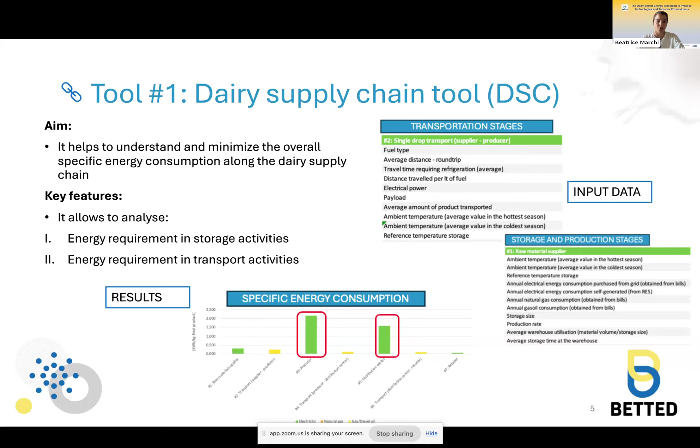The second tool is aligned with the first tool, but it shifts the focus onto a life cycle assessment tool. So it's not only focused on energy consumption, but includes the environmental impact perspective. The structure and result are similar, but in this case some more information is requested about other inventory data that can provide insight into the environmental perspective.

The three indicators we consider in the result are the global warming potential, so CO2 equivalent per kilogram of final product, the cumulated energy demand, so megajoule per kilogram, and the water use. We consider these three indicators because they are the most relevant for the dairy value chain, and the idea was also to have a simplified life cycle assessment.

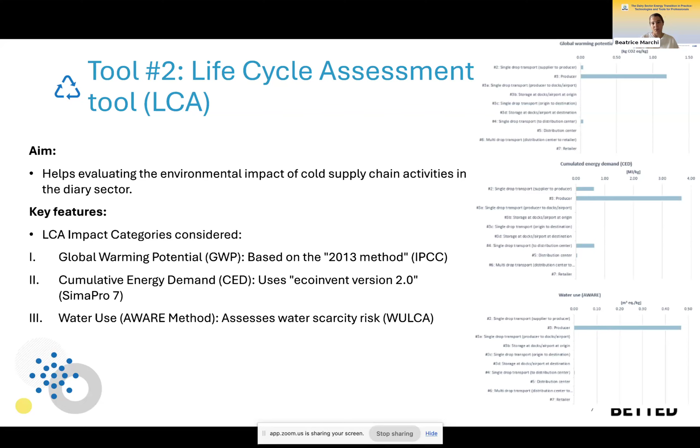Life cycle assessment is comprehensive and detailed, but it is also complex to use. So with this easy-to-use tool, the idea is that non-experts, companies, or users with access to only limited data can have this first assessment. The result, the idea, is that this tool provides results that complete the analysis the first tool provides, giving a wider perspective that also considers other relevant environmental impacts.

Based on the first and second tool, and on material available from the website, which consists of a list of best practices on energy efficiency measures, it's possible to start building a first list of energy efficiency measures with potential for our specific value chain.

The next step is tool number 3, focused on one different energy efficiency measure that we select with the support of the first and second tools. The idea now is to investigate if these measures are feasible from an economic point of view.

The life cycle costing tool is also, in this case, a simplified tool for this first assessment. The aim is to understand the costs and benefits of different energy efficiency measures and to compare their behavior to the current state, the scenario without any energy efficiency measure.

The life cycle cost includes input data, a template that supports the user in asking which are the main costs and benefits observable with the specific measure.

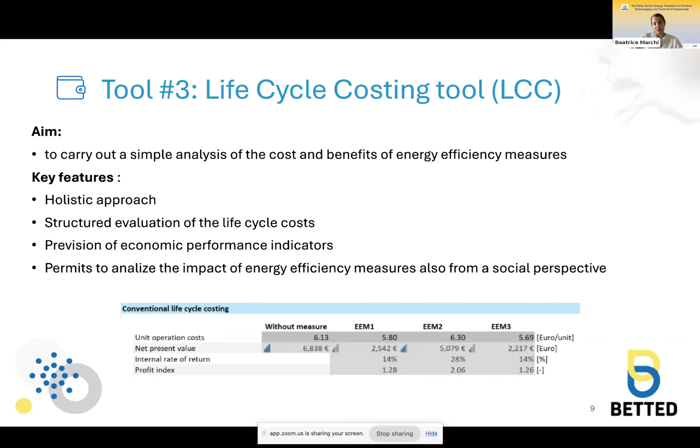With this result, we can prioritize the energy efficiency measures we selected based on the analysis performed with the previous tool, prioritizing them from an economic point of view.

These tools are focused on the supply chain, in the first assessment of energy efficiency measures. Now we have some tools focused on specific measures, starting with biogas in the dairy chain.

This tool is a bit more complex compared with the previous ones, and asks for some input data from the user, and in output provides a first techno-economic assessment on the use of biogas in the specific dairy chain we are considering.

The data required is a bit more complex and detailed, but there are also default values that can support the user if they don't have access to all this information. So also in that case, the idea is to have a first assessment.

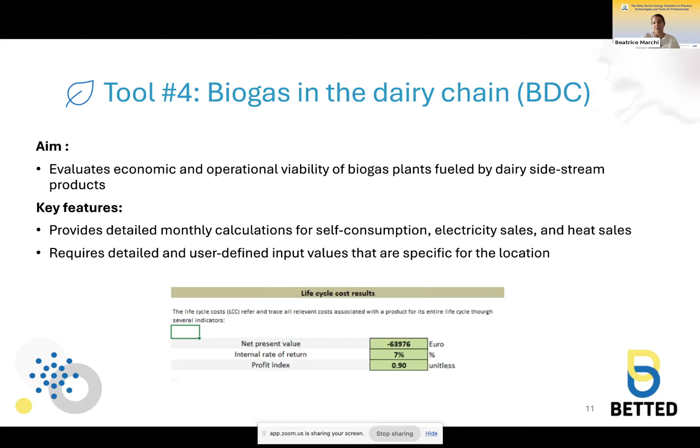The idea is not to design the biogas plant. The idea is to start thinking about this potential opportunity and to consider whether it makes sense to go on with the design of it.

Tool number 5 is focused on heat pumps. In this case, very few input data are required, and the idea is not to design heat pumps, but to show the user how performance changes in terms of economic savings and emissions reduction by changing the coefficient of performance of the heat pumps, and also by changing the share of renewables that covers the electricity demand for these heat pumps.

This is a first assessment. Of course, changing the coefficient of performance changes the performance, but this tool supports this first assessment in order to see if heat pumps make sense when the coefficient of performance is within a specific range of values.

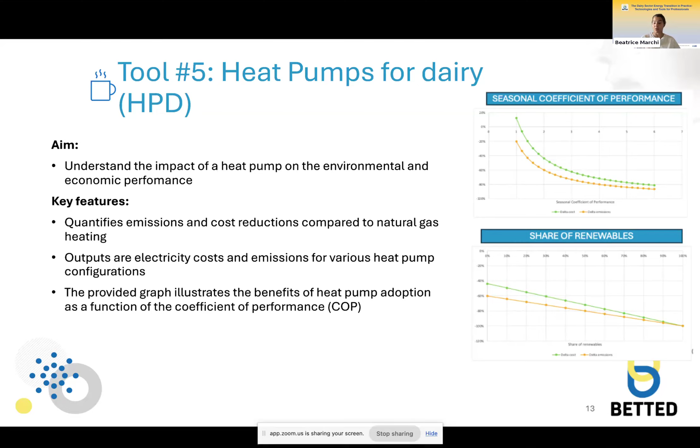The last two tools are no longer focused on technologies, but on tool number 6: cooperation with different actors. The idea is that the strongest companies inside the value chain can support the partners in order to improve their environmental and energy performance.

Tool number 6 is a questionnaire that supports the evaluation, the assessment of how the different partners, the different actors of the value chain behave in terms of sustainability.

There are 5 different sections covering climate impact, biodiversity and conservation, sustainability transition, social responsibility and governance, and energy efficiency, with several questions. Based on the answers that each actor provides, it is possible to assess and provide a score for each one of the actors.

In this way, it is possible to assess which are the weakest companies, which are the main issues. The idea is not to score them, but based on this result, to provide some input and support their improvement.

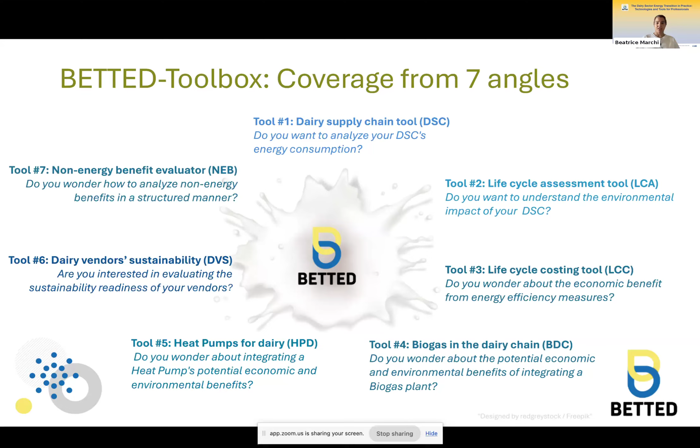The last tool is the non-energy benefit evaluator. Usually when we consider economic feasibility, we consider the energy savings deriving from the implementation of a specific measure. But this is not all the benefit that the measure can introduce.

The non-energy benefit evaluator is a tool that supports the assessment of all the possible benefits that a specific measure can provide to a specific supply chain.

It is not only a list of potential benefits, but the tool supports the user to investigate what can be the impact of this specific benefit. So it can improve the value proposition, reduce cost, or impact on the risk.

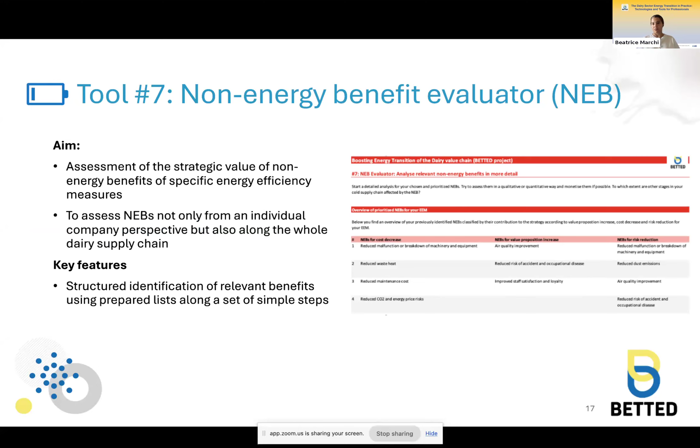Based on this template, it is possible to identify all the relevant non-energy benefits, understand their strategic impact, in order to make the measure more strategic to the financial officers, the actors inside the company that should approve the specific investment, and also to support the user in defining how to monitor this specific benefit.

There are strict regulations that govern this specific production process. In the operational context, the dairy chain we consider starts from raw material as raw milk, and the milk is then supplied to the production process.

This produces seasoned cheese, grana padano, with about 8 to 10 liters of milk for 1 kilo of cheese. During the production process, whey is also produced, about 6 to 7 liters per kilo of final product.

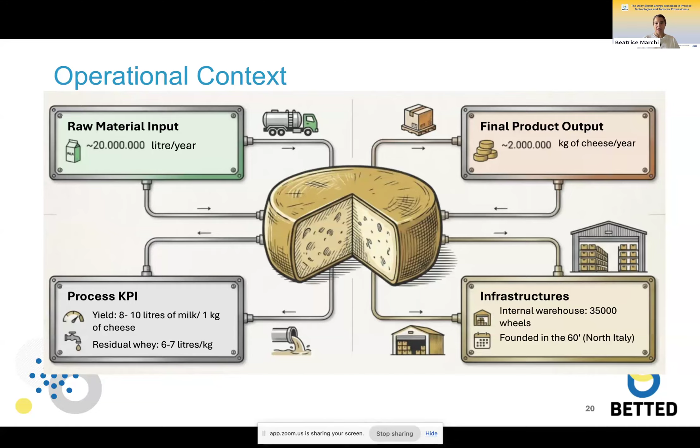Regarding the infrastructure, we started this analysis from the producer, the strongest company of this specific value chain. Thanks to their support we also reached their supplier and the transportation activities, and also the retailers, who have a quite big internal warehouse.

This is the scope of the analysis. The dairy processing is our core company, which processes the milk, makes the cheese, cooking and ripening from 9 to 24 months. But the scope is not focused only on those stages.

We also included suppliers, starting from milk collection and on-farm cooling, transportation from the supplier to the dairy processing with a refrigerated tanker, and then the final step is the distribution and retail.

In this specific case, we also included the transportation from the processing to the retail, but it is quite negligible because they have their store near their production plant. So we also included the data, but of course the result will be negligible.

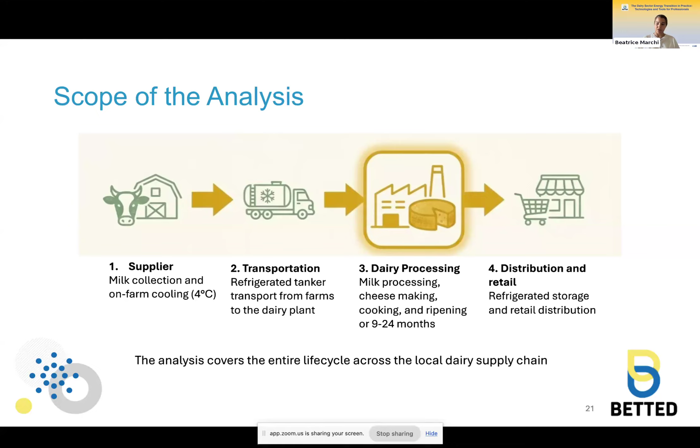The focus of this analysis was the entire life cycle from milk to grana padano cheese in a local dairy supply chain. We start with the energy consumption analysis.

With the use of tool number 1, we inserted all the required data, aggregated on a yearly basis. We can observe that the production stage is the largest energy consumer, exceeding the contribution of the other partners.

Another interesting aspect is the energy carrier. The producer mainly consumes electricity, and to a lesser extent natural gas. Natural gas is less relevant than electricity in share, but it presents higher potential in terms of energy transition, so electrification of the value chain.

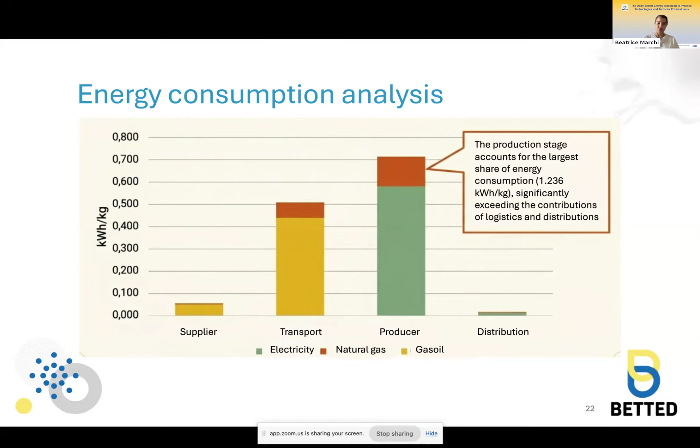Transportation is also relevant, and the main energy carrier there is gas oil, so in that case too there can be interesting measures that can support the energy transition.

With the information we had from the companies, we also investigated how energy is consumed among the different stages. For on-farm milk cooling, and also in transportation, there is the cold chain challenge: milk should be refrigerated and kept at 4 degrees Celsius. Even if these stages are not as relevant as production, they are very important because this refrigeration is needed to guarantee the quality of milk and avoid waste along the supply chain.

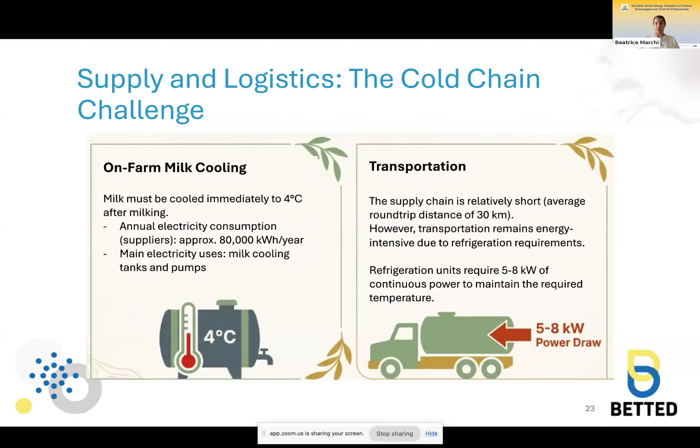Transportation in this specific case was not so relevant because we consider a local dairy chain, so the average round trip distance was not so big, around 30 kilometers. The power needed to cool the milk between the supplier and the producer should work only for a few limited amount of time.

We then focus on the producer, starting from the electricity hotspot. We tried to investigate where we are consuming electricity, and we observed that the main electricity consumption was in the cheese ripening. So we are no longer speaking about milk, but about cheese that should be ripened, seasoned cheese, where temperature requirements are no longer as stringent as for milk.

We are no longer speaking about 4 degrees Celsius, but we still need refrigeration, even if at a lower power - a lower load of cooling demand. We need this lower cooling demand for a longer period, since the ripening warehouse is working all day, all week, all year. So even if the demand in terms of power is very low compared to milk storage, we need this cooling for a lot of the year.

And not only for temperature, but also for relative humidity and ventilation. In order to guarantee the quality of the final product, there are stringent requirements in terms of temperature, but also humidity and ventilation. So our main hotspot for electricity consumption is based on guaranteeing these requirements for the conditions where we store the cheese.

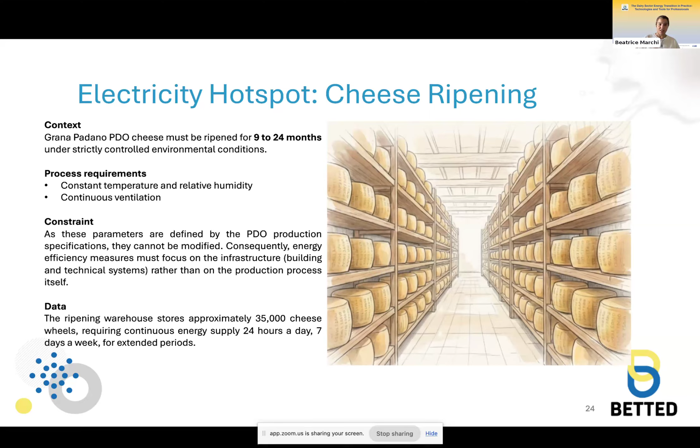For the thermal hotspot, we observed previously from the producer's bar chart that natural gas is less relevant than electricity, but it represents a huge consumption if we think about its environmental impact.

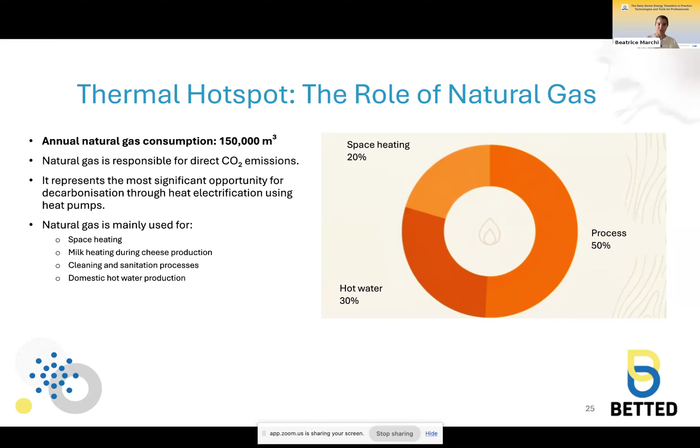We went deeper trying to understand where we are consuming natural gas, and we observed that 20% was for space heating, 30% was for hot water production, while half of the consumption was for the process. This tells us that the 50% of natural gas consumed for the process represents a relevant opportunity for decarbonization, for example with electrification using heat pumps.

The last stage was retail distribution - transportation was made internally, so it is not very relevant. This final stage is also not as relevant as the other stages like transportation and production, but there are a lot of inefficiencies because at least half of the energy consumption is related to refrigeration of display cabinets and cold rooms, which are subject to a huge number of door openings, and if they are not sealed well, they can waste a lot of cooling.

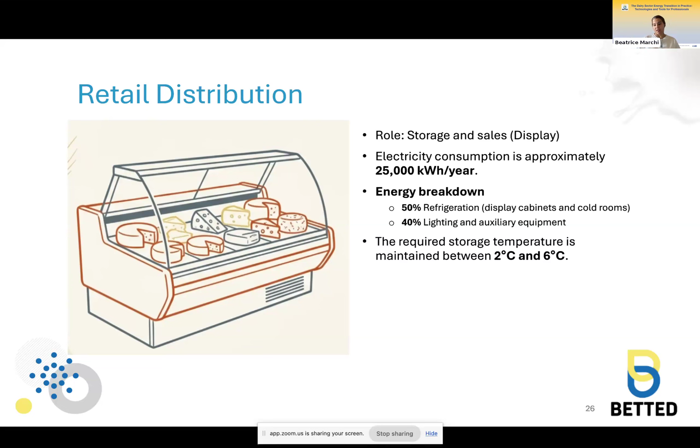And of course there is a lot to do in this specific stage as well. So based on the assessment of the opportunities for each one of these stages, we provided 3 to-be roadmaps, 3 different scenarios in order to improve the performance of the value chain.

Scenario number 1 was a scenario where we suggested the producer implement a photovoltaic system on their warehouse. This is not an energy efficiency measure, but it is a relevant measure if we are talking about transition - the decarbonization of our dairy value chain - because we can provide electricity with green energy instead of fossil fuel.

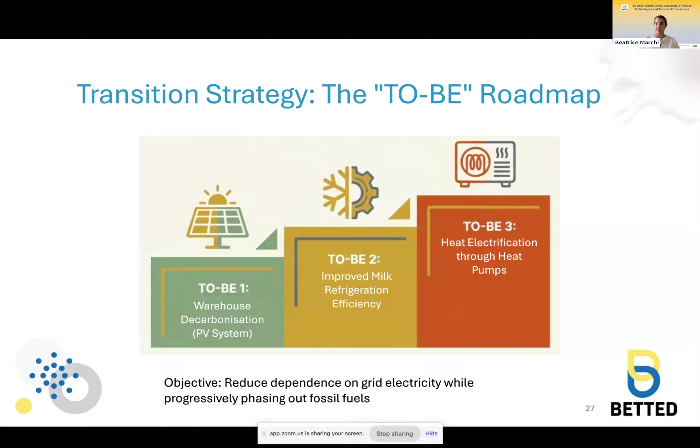Scenario number 2 was focused on the improvement of efficiency of refrigeration equipment, while scenario number 3 was focused on the heat electrification with the use of heat pumps. These 3 scenarios were based mainly on the overall objective to decarbonize the dairy value chain, to support the energy transition of our case study.

As I said, in scenario number 1, we investigate the installation of a PV system supported with battery energy storage system. The idea is that we can cover the electricity demand with our PV system, and the battery allows us also to cover the demand during the night periods, because our main consumption of electricity was in the warehouse, and the warehouse should keep the same condition also during night. So our consumption is not linked to the daily process, but is relevant also during night, and the idea to integrate the battery storage is to cover also this night consumption.

We consider also the installation of some sensors and some variable speed ventilation system in order to modulate the energy according to the required condition that the warehouse has. Based on the assumption that we consider a PV system that covers about 30% of the annual electricity demand, using the tools that we presented before, we analyze the TO-BE scenario, and the expected outcome is that we can obtain a significant reduction in indirect emissions, because we are no longer using fossil fuels but green energy.

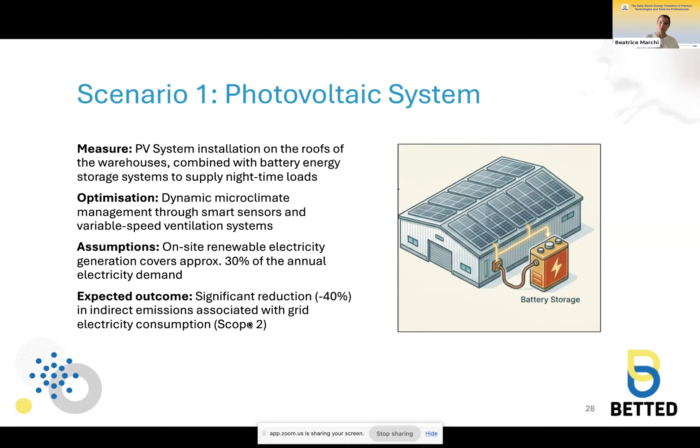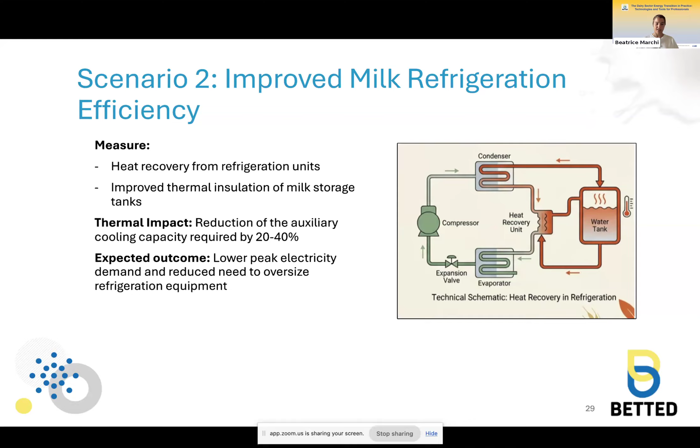Second scenario is improved equipment for refrigeration. We included heat recovery from the refrigeration unit and improved thermal insulation. This scenario allows us to reduce the auxiliary cooling capacity by 20-40% and also allows us to reduce the peak electricity.

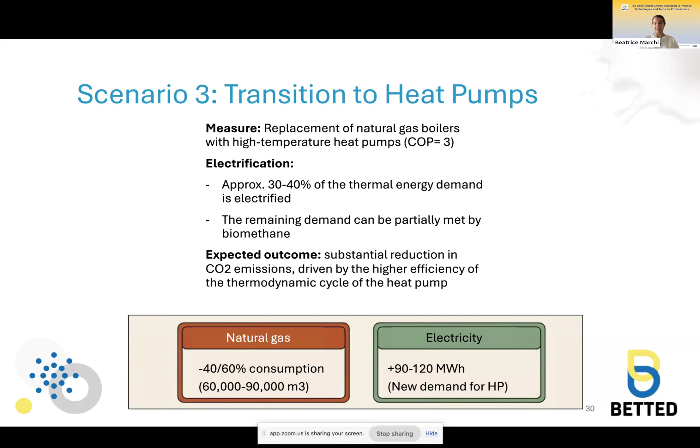Scenario number 3 was the transition to heat pumps. Heat pumps increase the demand for electricity, but allow us to reduce by 50% the consumption of natural gas. Comparing the overall performance, the reduction of the natural gas consumption justifies this little increase in electricity consumption, especially if we implement the PV system. So considering all the measures, comparing the current state to the scenario where all measures were implemented, we reduced by 11% the specific energy consumption, by 24% the total annual cost, and by 26% the overall emissions per year.

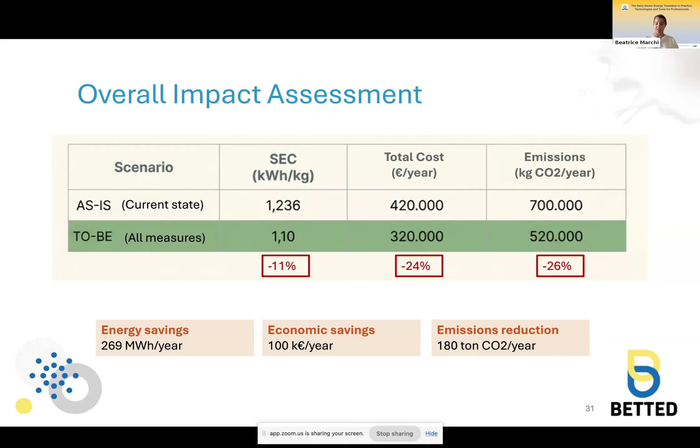The key takeaway from this case study is that the dairy value chain, since we are talking about food, is subject to stringent regulation of the ambient conditions where we store the raw material and final product. But there is a huge potential to improve the overall performance while keeping the quality of the product. So we are not reducing consumption at the cost of quality — it is possible to improve the overall performance while keeping the quality of our product.

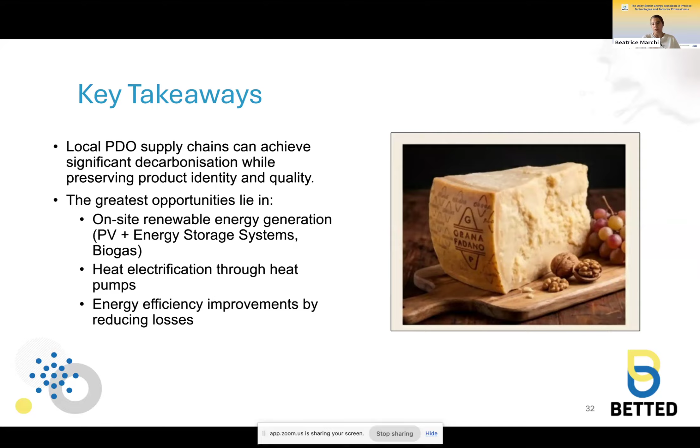In this specific case study, we identified these scenarios, but there are, of course, a lot of other opportunities. So thank you, and if you have any questions, I will be glad to answer.

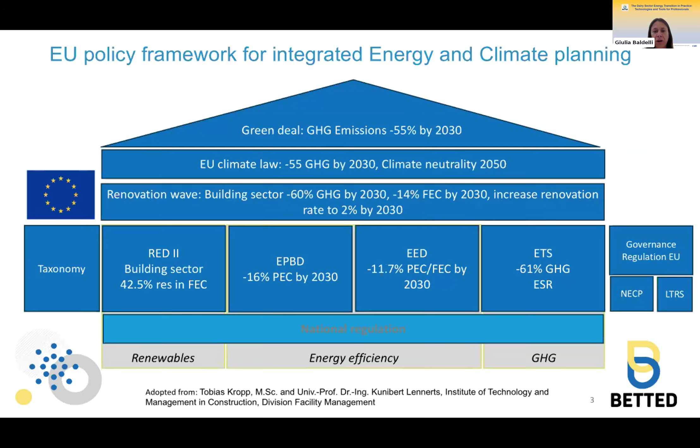Then we have the Energy Efficiency Directive, but I will talk about this in the next slide. And we have the taxonomy and governance regulations, where member states are required to develop a 10-year integrated national energy and climate plan, highlighting how they will achieve the goals on energy and climate, and a long-term renovation strategy to support the renovation of the national stock of both residential and non-residential buildings, both private and public.

Energy efficiency has been tackled by several directives. The most important is the Energy Efficiency Directive, the revised EED, which sets a binding target to reduce both primary and final energy consumption by at least 11.7% by 2030, compared to the 2020 EU reference scenarios. It also extends existing energy saving obligations and aims at empowering consumers by granting them access to data on their consumption. Finally, it introduces an annual energy consumption reduction target of 1.9% for the public sector.

The Energy Performance of Buildings Directive covers a wide range of policies and supporting measures for improving energy efficiency of buildings. There's a clear vision for the complete decarbonization of the building stock by 2050, also thanks to the introduction of smart and efficient buildings through the use of ICT and smart technologies.

The industrial sector is well covered by Article 11 of the Energy Efficiency Directive. Since the recast of the EED, this article shifted from a size-based logic to a consumption-based logic, meaning that regardless of the size of a company, those with an annual energy consumption above 10 terajoules, the threshold, will need to undergo an energy audit. Companies with an annual energy consumption above 85 terajoules will need to implement an energy management system, regardless of the size of the company. The EU taxonomy and the EU directive on corporate sustainability also cover the industry sector.

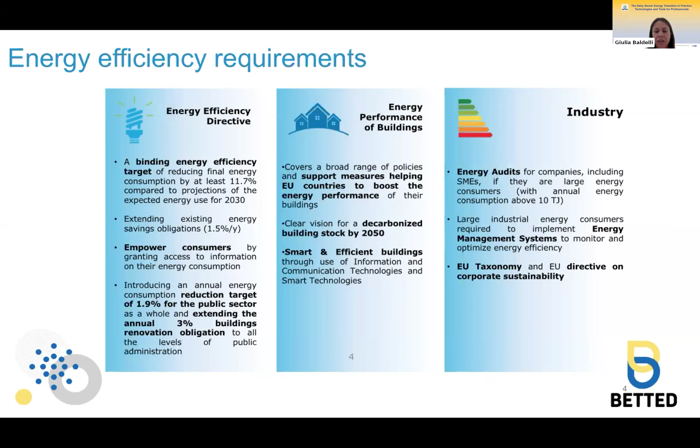Focusing instead on the EU dairy sector, this is the second biggest agricultural sector in the EU, accounting for more than 12% of the total agricultural output. The data come from the Eurostat database, year 2022, where the EU was leading globally with 160 million tons of milk produced, and almost 94% of this milk was delivered to dairy facilities for the production of dairy products such as cheese, butter, and yogurt. There were around 12,000 processing facilities throughout Europe, collaborating with more than 650,000 dairy farmers.

The European agricultural sector operates under strict food safety and animal welfare regulations, and the Common Agricultural Policy provides financial support to farmers.

Future growth opportunities are driven by global demand, but the sector must also address price volatility, climate change, and sustainability challenges. This is a picture of milk production in the EU in 2022.

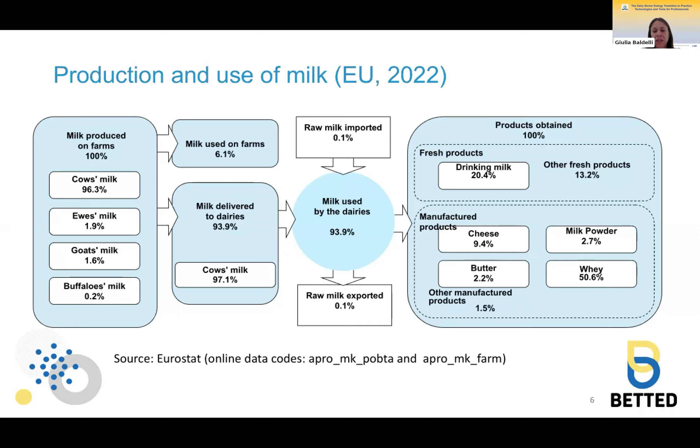The industry sector is the largest energy consumer in the EU, responsible for around a third of total energy consumption. The food sector ranks as the fifth largest energy consumer and greenhouse gas emitter, just following the energy-intensive industries.

The consumption due to heating processes required in the dairy sector is increasing, and it also accounts for 62% of the greenhouse gas emissions in this sector.

According to the IEA report of 2020, 59% of total industrial energy saving in the EU could be achieved in less energy-intensive sectors, meaning that before the recast of the EED, only large companies were obliged to undergo energy audits and energy management systems. SMEs were excluded from this article, and in the dairy sector, as in many other manufacturing sectors, more than 99% of companies are actually SMEs. So that's where this study comes from.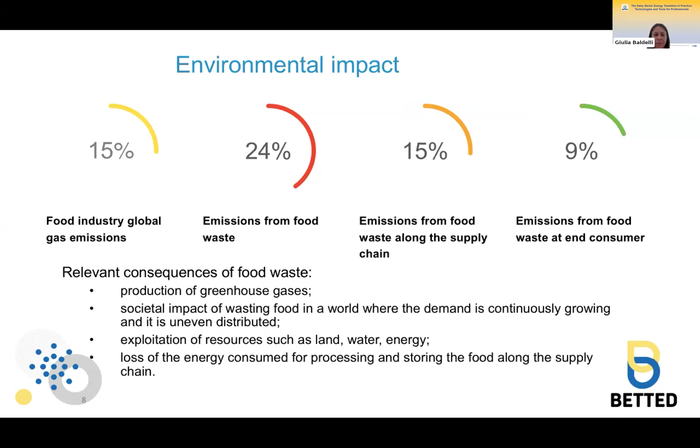The food sector accounts for around 17% of the EU's gross energy consumption, and industrial processing, including dairy, represents 28% of the energy used within the food sector.

There are energy-intensive processes that require heat, such as pasteurization and drying, as well as refrigeration. These contribute heavily to energy consumption and often rely heavily on fossil fuel. This highlights the need for energy efficiency and the introduction of renewable energy sources.

Adoption of renewable energy can include, for example, biogas from dairy waste, manure, and organic residues, which can reduce the consumption of fossil fuel by turning this waste into renewable energy.

Heat pumps can reduce energy consumption by up to 40% compared to traditional heating systems, using heat extracted from ambient air or from the ground to provide both space heating and hot water for farm operations.

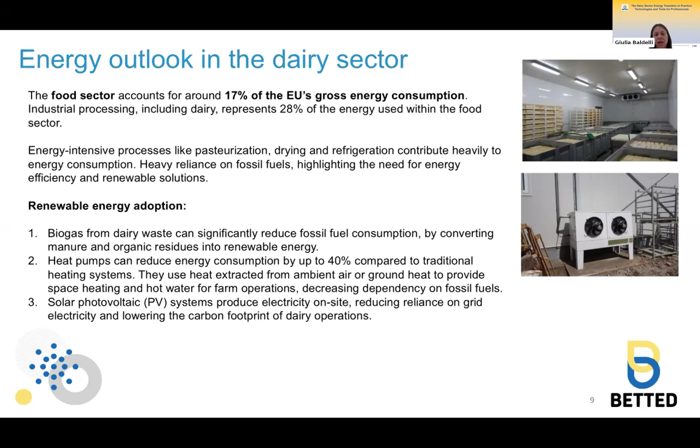Solar photovoltaic systems generate and use electricity on site, reducing reliance on the grid and lowering the carbon footprint of dairy operations.

Here are some energy efficiency measures that can be adopted in the dairy sector across different steps of the value chain. First, the introduction of energy management systems and energy auditing to better understand where energy is mostly consumed, or whether there is waste of energy in some processes.

Then the introduction of pre-coolers and heat recovery systems, in order to transfer heat from the raw milk to an intermediary cooling fluid before it's cooled down. Heat recovery systems can capture waste heat from milk cooling and refrigeration processes to heat water used for cleaning or other farm operations.

Install efficient lighting, such as LED lighting and motion sensors, in the facilities. LED lights consume up to 75% less energy than traditional bulbs and have a longer lifespan, reducing maintenance costs.

Properly insulating the steam pipes to reduce heat losses and lower fuel consumption for heating.

Also, optimization of the compressed air system: regular maintenance to detect leakages and reduce wasted energy. Also consider variable speed air compressors for increased efficiency.

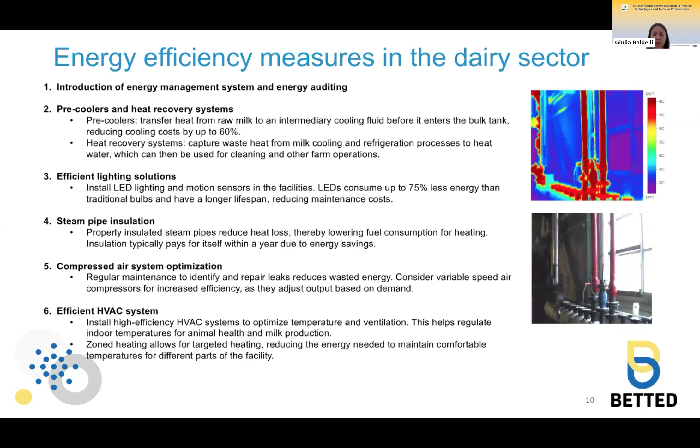And that was all. Thank you.

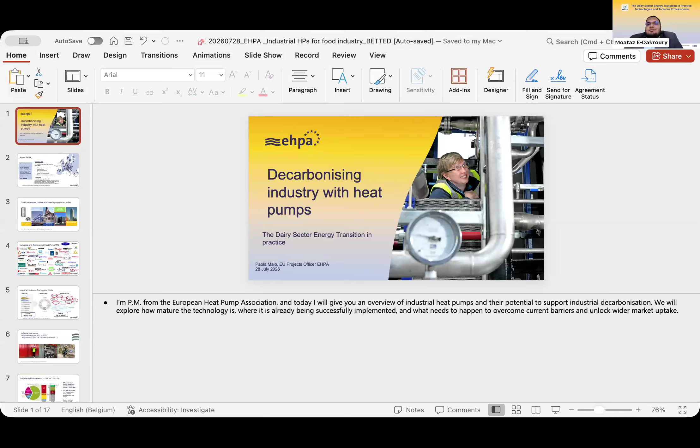Giulia, can you please? Yes. Oh, Paola, we can't hear you. Yes, thank you. Can you hear me and see my presentation? Yeah, loud and clear, we can see your screen, but in presenter mode, so you will need to present it. Hit F5 or press present. Yes, we can now see it. Oops. You can see it now. Yeah, we can see it now. Thank you, please go ahead.

Thank you so much. Hello everyone, I'm Paola Maio from the European Heat Pump Association, and today I will give you an overview of industrial heat pump technology and its potential to support industrial decarbonization, as heat pumps are also one of the topics we developed in the BETTED project. We will explore how mature the technology is, where it has already been successfully implemented, and what needs to happen to overcome current barriers and unlock wider market uptake.

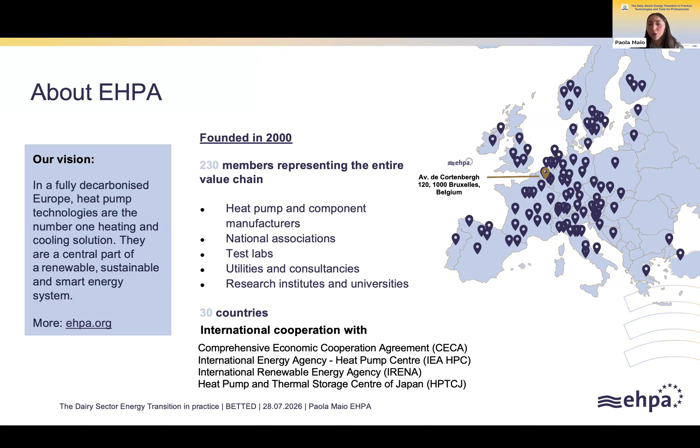Just a few words about EHPA, the European Heat Pump Association. We were founded in 2000. We have around 200 members, and we represent the whole value chain of heat pumps. So our members are not only heat pump component manufacturers, but go a bit broader, we also have national heat pump associations, test labs, utilities, and consultancies as members. Our main vision is to reach a fully decarbonized Europe where mainly heat pump technology is used.

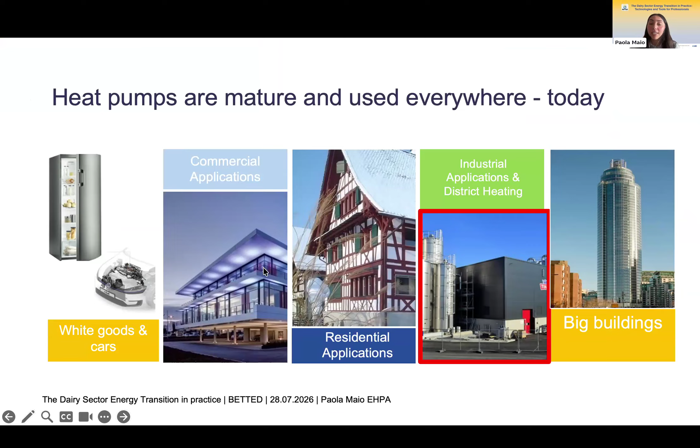Heat pumps are currently a mature technology and are used everywhere today. They are used in white goods, cars, and actually everyone that has a fridge at home has a heat pump. They are also used in commercial applications, residential and industrial applications, district heating, and big buildings. In EHPA, we cover almost all of these applications.

Going more in detail into the technology itself, for industrial heating today, the sources used for industrial heat pumps can go up to 70 degrees, and the sinks, so the application for industrial heat pumps, can go up to 200 degrees. Of course there's research and innovation going on, we can go even higher, but at the moment we say mature technologies go up to 200 degrees.

Of course, the smaller the difference between the heat source and the sink, the easier, more efficient, and less costly the application is, because you need less electricity.

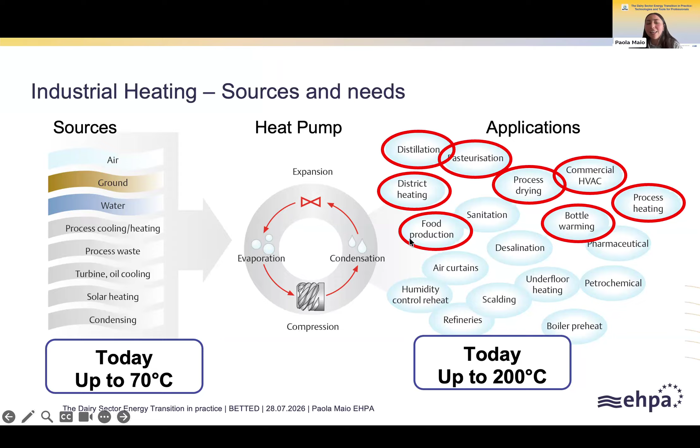So you may wonder where the difference is between industrial heat pumps and residential heat pumps. Well, of course they reach different temperatures, an industrial heat pump can reach higher temperatures, and they also have a higher capacity than residential heat pumps. Also, another big difference is, of course, the dimension, as industrial heat pumps can be as big as a whole house.

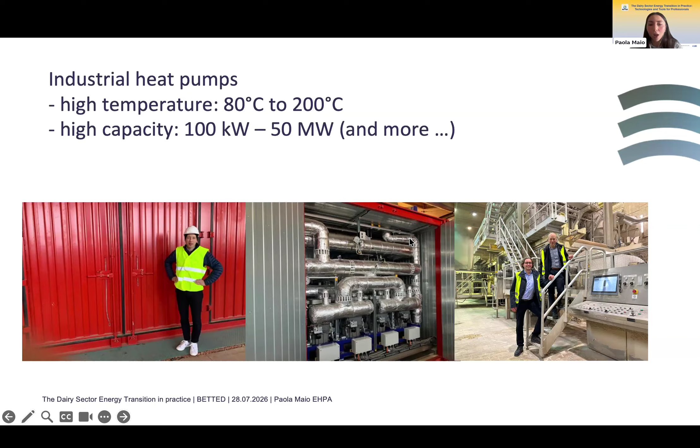There's a lot of potential for this type of heat pumps. Here you can see in this graph that 37% of process heating in Europe is below 200 degrees. That corresponds to 722 terawatt hours of industrial heat demand below 200 degrees. And this is a huge potential because at the moment in Europe, we only have an installed capacity of around 7 terawatt hours.

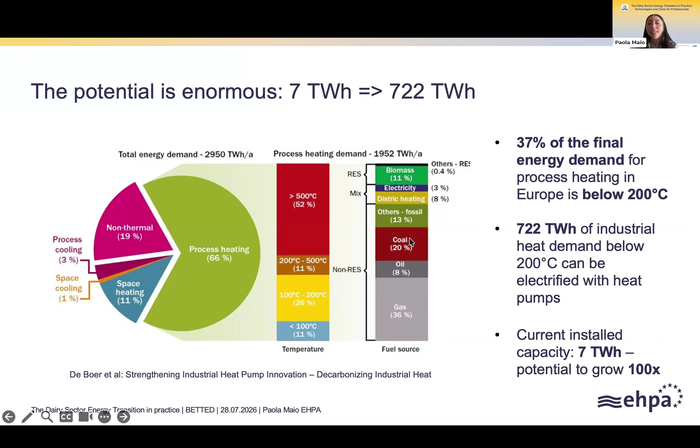So this means you would have a potential of 100 times what is currently installed. But there is not only big potential in applying industrial heat pumps, it is also very good for competitiveness in Europe because the heat pump industry has a very strong European basis. So it gives a lot of economic value and job opportunities in Europe. Here you have on this map the headquarters of large heat pump suppliers in Europe, and you see there's quite a lot.

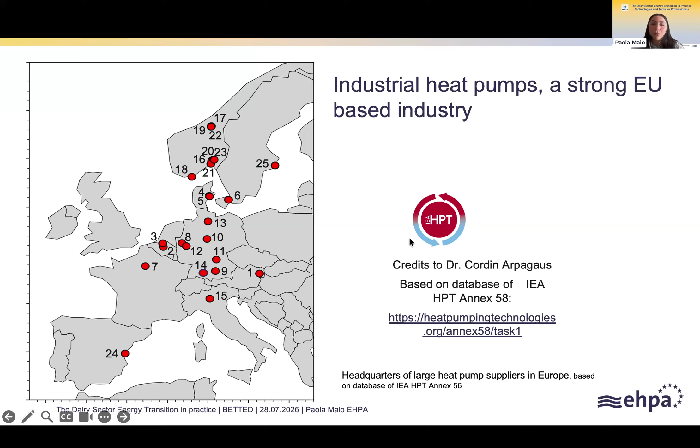And also interesting is that with these machines, as I said, they are very big, so they are also produced close to the place where they are used. There's really no need to produce an industrial heat pump, for example, in Asia, and then transport it to Europe. It's much more cost efficient to produce it close to the place where you use it.

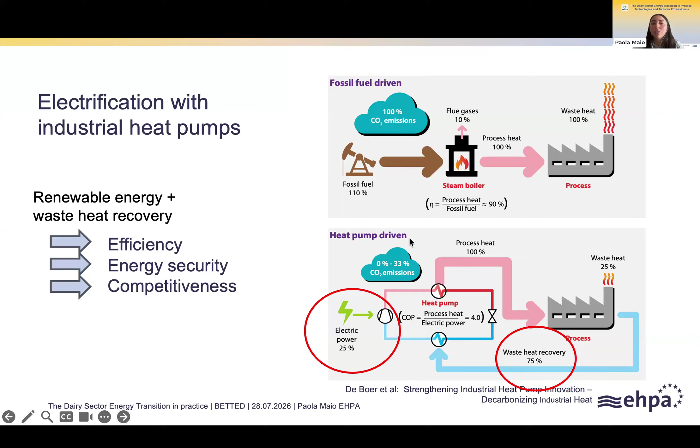Electrifying with industrial heat pumps also comes with a lot of advantages. If you use fossil fuel to heat, you use around 1 unit of fossil fuel to have 1 unit of heat. Instead, if you use a heat pump, with 1 unit of electricity you can have 3 or 4 units of heat, because you use as a basis your source temperature, which is already higher, and you just need some electricity to compress it and raise the temperature a bit higher. So yes, it's very energy efficient, and it's much better for energy security as well, because we are less reliant on imported fossil fuel from countries such as Russia.

So to go from theory to practice, we have different examples of industrial heat pumps already fully operational and deployable today. For example, one success story comes from FrieslandCampina, a Dutch dairy company, where mechanical and thermal vapor recompression has been used successfully in dairy processing for many years. In their powder factories, waste heat from the evaporation process is upgraded and reused to produce hot water for drying, improving energy efficiency a lot while also reducing water consumption.

In cheese production, heat pumps complement highly regenerative thermisation and pasteurization processes by covering the remaining heating and cooling demand. This case really shows that industrial heat pumps are already a mature technology and an effective solution, although careful process integration is needed to match heat supply and demand.

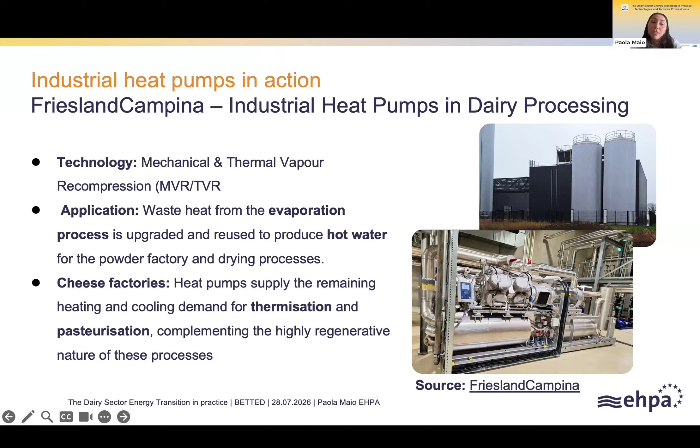Other examples of already operational industrial heat pumps include a paper factory in France, a chemical plant in the UK, and speaking of the food and beverage sector, a French pasta company, a dairy factory in Norway, and many more. You can find all the details and read about these stories on our website under the heat pump stories page.

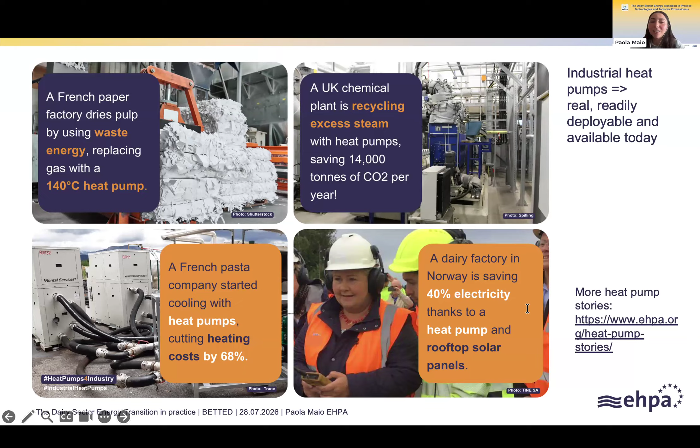The first one is, of course, economics. As long as the fossil fuel alternative is cheaper, it's very hard to convince industry to switch to other technologies, because there are a lot more taxes and levies put on the electricity bill, which makes the cost much higher. So we must ensure that taxes and energy costs actually boost electrification. We also have to make sure that industries that actually decarbonize their processes are financially supported.

Secondly, also, of course, regulation. There's a need for long-term stable policy to show that decarbonization is really the way to go for all sectors, and this could make it easier for decision makers to choose in factories. We should also require the electrification of industrial processes when, for example, there is a new permit or license for an industry, or a renovation of an industry. It should be required to electrify wherever possible.

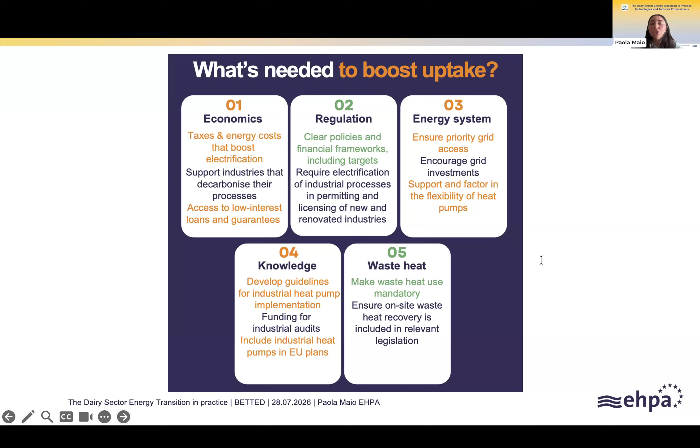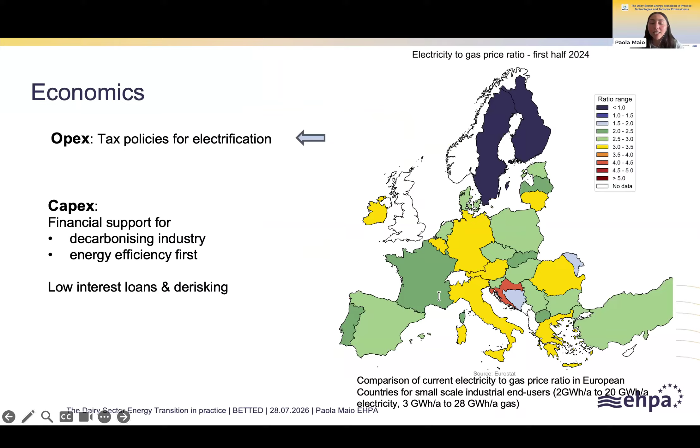To complement what I was talking about before regarding the economics, here in the slide you can see the comparison of the current electricity to gas price ratio in European countries for small-scale industrial end-users.

Speaking about opportunities, one I would really like to highlight is the Innovation Fund Auction for Industrial Heat Decarbonization, initiated by the European Commission. This is a fundamental instrument to accelerate the deployment of industrial heat pumps, with up to 1 billion available for projects. So if you are an industrial end user, or you work with a company, we really encourage you to submit a bid, because the stronger the signal that this market is real and ready to scale, the more likely this auction gets institutionalized as a permanent instrument rather than a one-time pilot.

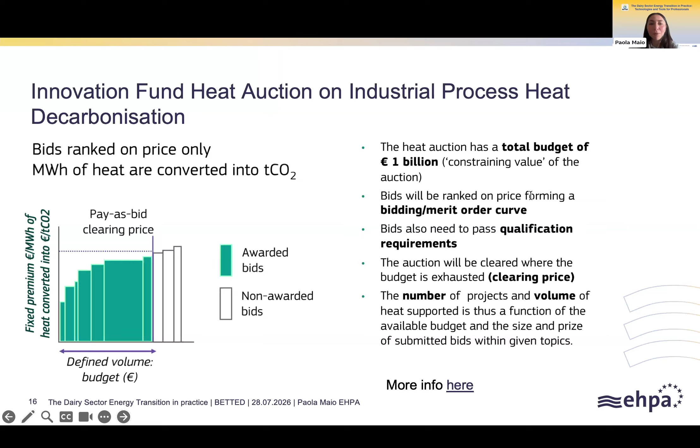So that is it from my side. If you would like to know more about our initiatives and events in which we raise awareness about these technologies, you can follow us on our social media, and you can also check our website. And if you have any specific question, you can always reach out to me. Thank you for your attention.

Thank you very much, Paola. That's very interesting. I second what you said about engineers and facility managers underestimating the potential of industrial heat pumps. And speaking of waste heat, this takes us to our next presentation, which I will do myself.

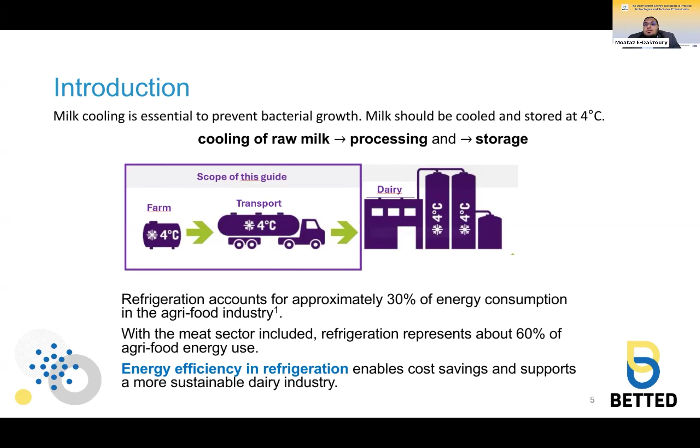Pre-coolers are one add-on that I think Julia hinted on in her presentation, and let me pick up from there rather than re-explaining. It's a technology used to reduce energy consumption, because it takes 22 watt-hours per liter of milk at 35 degrees Celsius to cool down one liter of milk. And for every 1 degree Celsius we're able to reduce before reaching the tanks, we're able to save almost 0.5 watt-hours per liter. This accumulates to a significant percentage of the energy consumption.

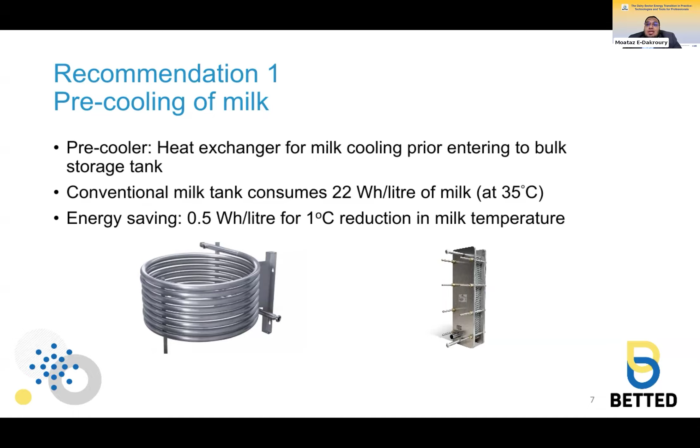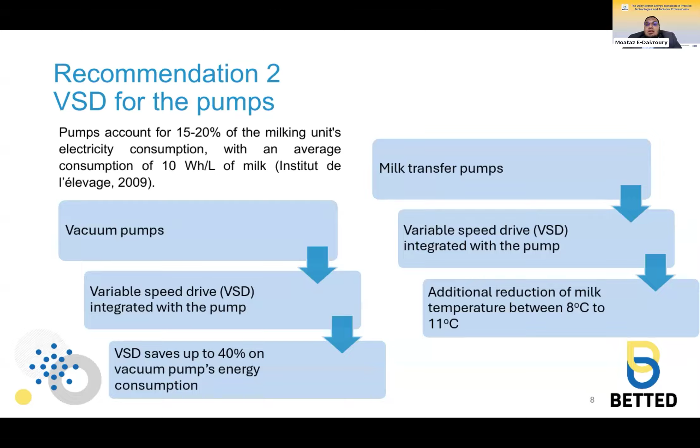I think Moataz is having some connection problems. Let's just wait a couple of minutes till he reconnects.

Sorry, everyone. Something went wrong with my connection. Please let me know if you can see my screen or if I need to share it again. We can't see it yet, Moataz. We cannot see the screen, but maybe I can share the screen and change slides for you.

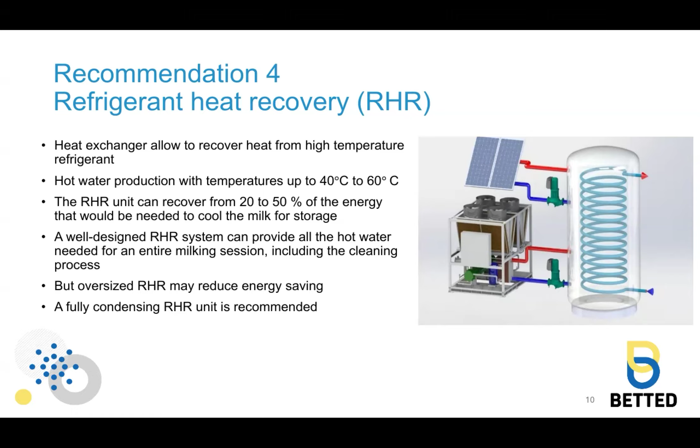The next measure is water heaters without tanks, the same technology used in instant heaters. This reduces or limits the standby losses from tank heaters, estimated at around 24 to 60% per day. By removing the tank altogether, we save about 90% in some case studies, and we may use solar or geothermal sources to reduce the remaining part.

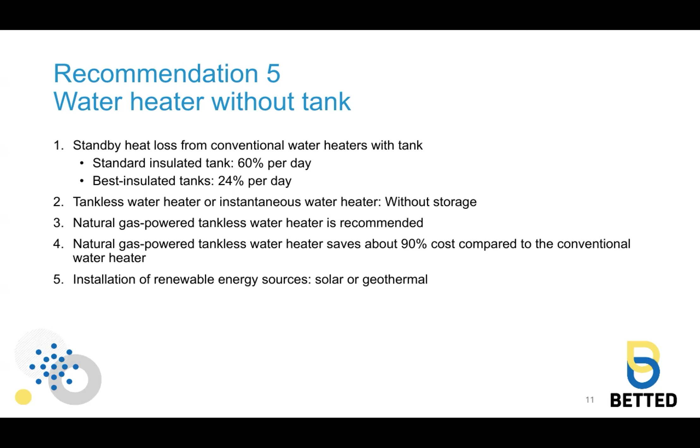So, recommendation again. Of course, the obvious thing that you don't need an expert to tell you is that keeping the facility maintained and in its best operational case reduces energy consumption significantly.

It's also important to keep periodic leak control as required by F-gas regulation, as well as cleaning heat exchanger surfaces every 3 to 6 months to improve heat transfer across these systems.

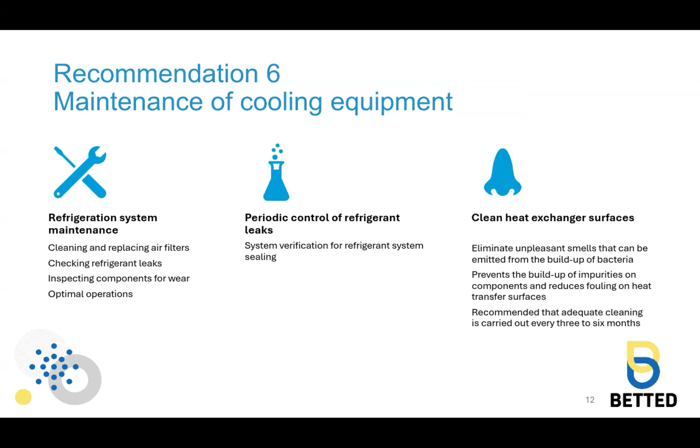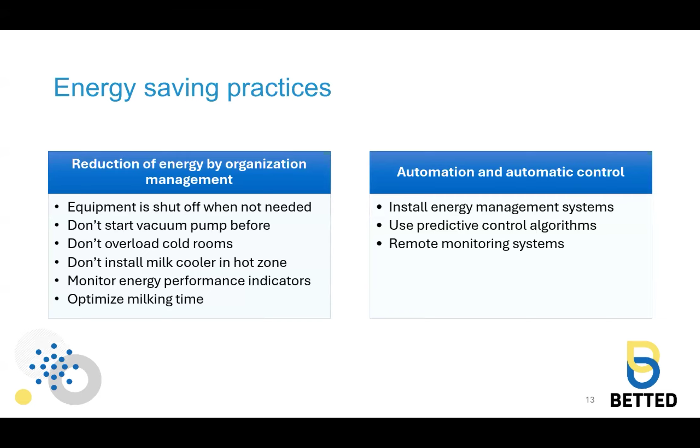There are other facility level and system level measures: shutting equipment off when not needed, keeping the cooler closed and out of hot zones, optimizing milking time, monitoring energy performance indicators, and using energy management systems and predictive control.

The next measure is focused on the transport stage of the value chain. Transport consumes no cooling energy in itself, but poor insulation dissipates the energy already spent.

There are two cases of insulation defined under the ATP agreement: IN at 0.7 thermal conductance, and heavily insulated, called IR at 0.4 watts per square meter Kelvin. Implementing heavily insulated tanks for refrigerated transport helps significantly with reducing energy losses.

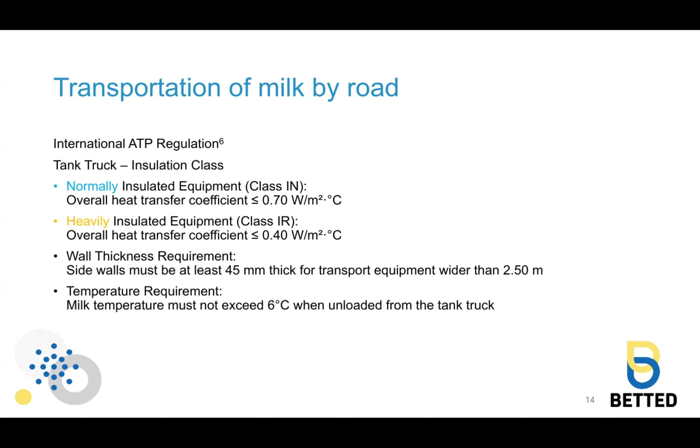From a technical point of view, the BETTED project helps small and medium enterprises identify areas of improvement, and at the same time provides training to these companies to help them identify these areas themselves, and act on the low-hanging fruit and areas of improvement they can implement at limited cost.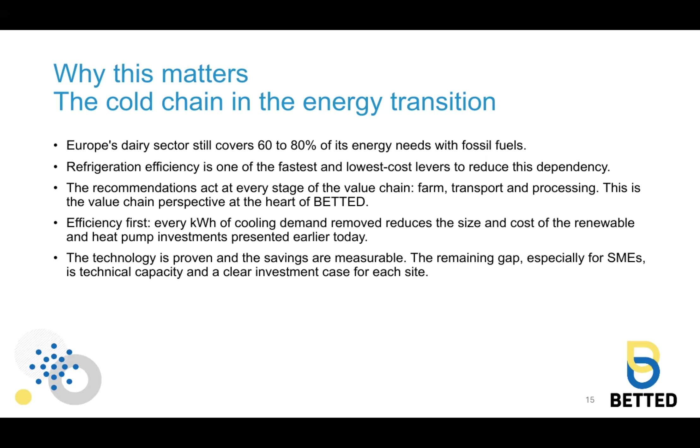This takes us to the training offer I hinted at earlier. As Patricia mentioned, the BETTED project offers tailored trainings to companies that are Europe-based in the dairy sector, tailored based on the company-owned data that Patricia walked us through. This training is provided fully funded, free of charge to participating companies.

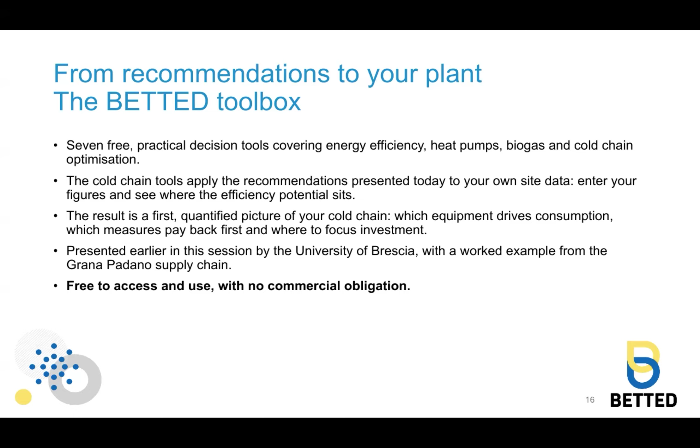The key takeaway here is that cold production is 25 to 50% of dairy plants' energy cost. We have shared with you proven measures that exist at every stage, and the BETTED toolbox that you can use, and you can get training not only on using the toolbox, but also on the different measures the toolbox allows you to use and decide on, as part of the project, all fully funded by the project.